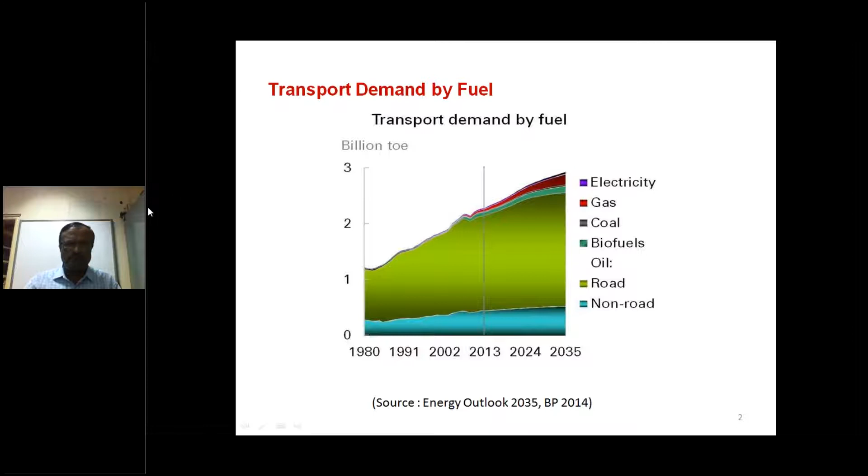So before that, let us have a glance over the basics of engines. It's actually not necessary, but it is part of this. For those who have not studied this, it will be useful. So I'll go quickly over the engine fundamentals.

The internal combustion engine is a compact engine, and that machine was invented in early 1680, first by Christiaan Huygens. This engine converts heat energy into mechanical output power.

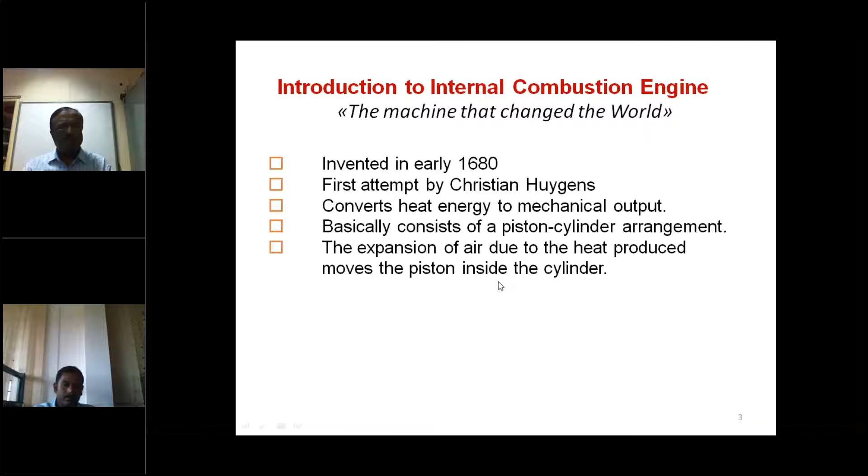Basically, this engine utilizes the slider crank mechanism, which consists of a slide, that is a cylinder and piston arrangement, connected to the connecting rod and crank, and thereby reciprocating motion is converted to rotary motion. Simple mechanism. In order to move the piston, some gases are to be expanded, and thereby that gas, that is the air, is taken and it is heated by means of burning the fuel. That's why all these processes are carried out inside the cylinder.

Now, as you know, there are various types of IC engines that are classified based upon various categories. Mainly we have two major classifications, and others are sub-classifications based on the combustion that is taking place. Spark ignition engine, that means the petrol engine. This engine, as you know, is a very compact engine, giving high power density with low combustion noise, low vibrations, etc. So many more advantages are there with these SI engines.

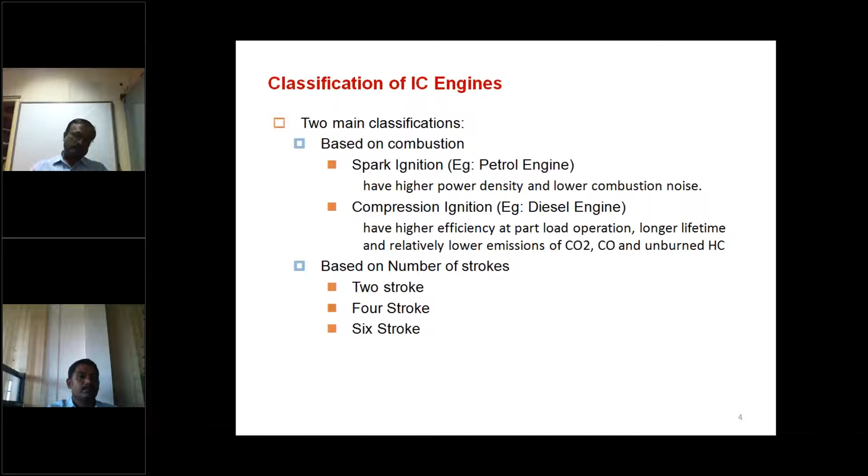The other class is the compression ignition. You can see at part load operations, these are the best engines, with lower emissions of CO2, CO, carbon monoxide, and unburned hydrocarbons. This engine is mostly used for almost all vehicles nowadays because of the economy in fuel. Then based on the number of strokes: 2 strokes, 4 strokes, and nowadays 6-stroke engines are being developed for better efficiency.

Regarding the working, here I have taken the four-stroke engine, that means the petrol and the diesel engine. We shall have a fast glance over this, so that whatever modifications are needed, the performance can be improved and the emissions can be reduced. So we can think of the four-stroke petrol engine. During the suction stroke, the air and fuel are mixed thoroughly and sucked in, during which the inlet valve opens, and this continues until the piston reaches BDC. Then during the next half revolution of the crank, the piston moves from BDC to TDC, compressing the air-fuel mixture into the small combustion chamber or the clearance volume.

At the end of compression, the spark is given, and more heat is added, so the pressure and temperature of the mixture rise, exerting the necessary force, and the piston is pushed down. That way the engine produces the power, hence we call this the power stroke. Afterwards, in the next successive half revolution of the crank, the piston moves from BDC to TDC, and the burnt exhaust gases are let out by opening the exhaust valve. Here the valve operations are very important: when the valves open and when they close.

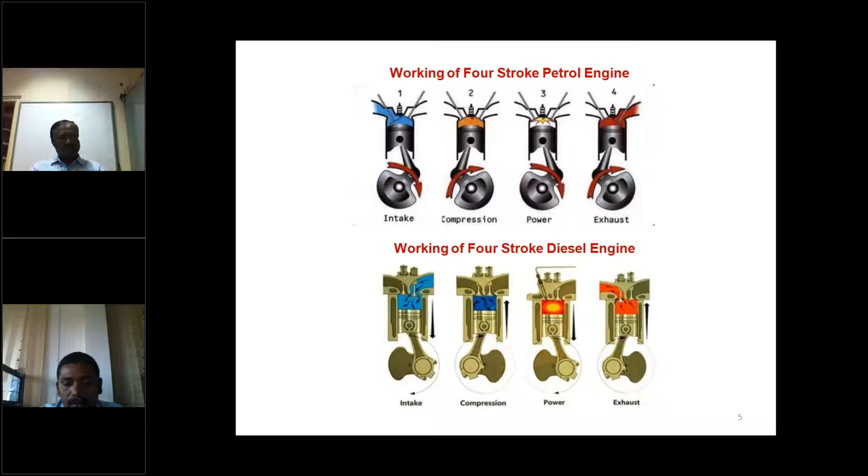Here also the valve operations play a very important role in the performance. If they are opened and closed at the right time and accurate positioning, the intake will be proper. If the intake is proper, the power produced will be higher. And the exhaust gases must be removed perfectly by the exhaust valves, so that timing is also very important. And here, instead of a spark, at the end of the compression stroke the diesel is injected. So the injector timing is very important.

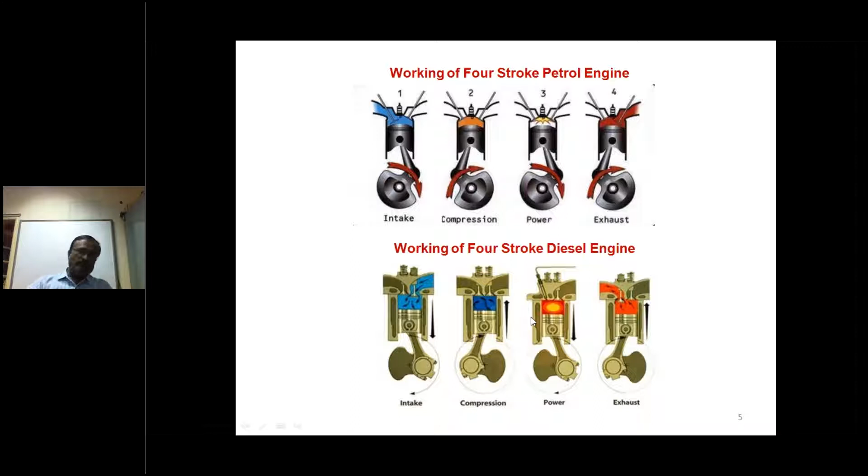So these are the things that we have to consider while modifying or improving the performance of the engines. These are for the advancement of the engine. From the combustion point of view, we have to look after advanced combustion engines. So the goals and strategies are set up.

The internal combustion engines have been used for more than a century. As I told you, it was invented around 1680. Since then, it has been modified, and significant improvements in energy have been found. Efficiency is being boosted, and also the emissions are being decreased. Though it is optimized, there is still scope to increase the efficiency and reduce the emissions.

The boosting of efficiency, or the increase of performance, is one of the most promising and cost-effective approaches. Due to this, we can find fuel economy, and thereby we can save a lot of fuel, and thus we can get higher efficiency.

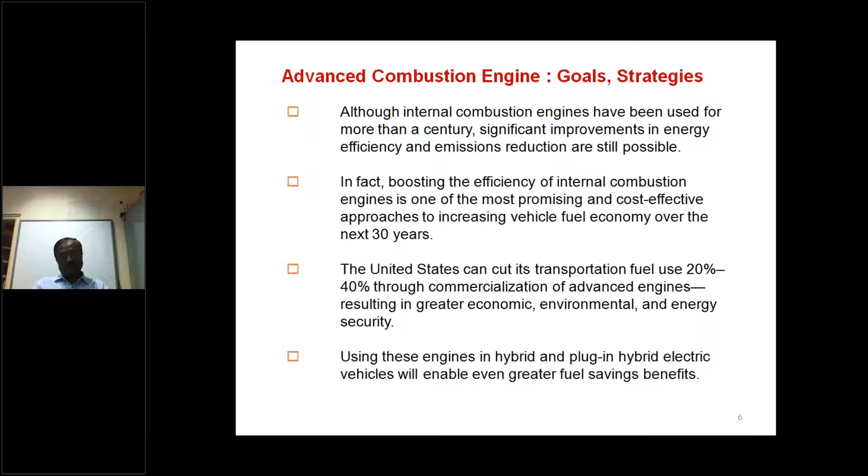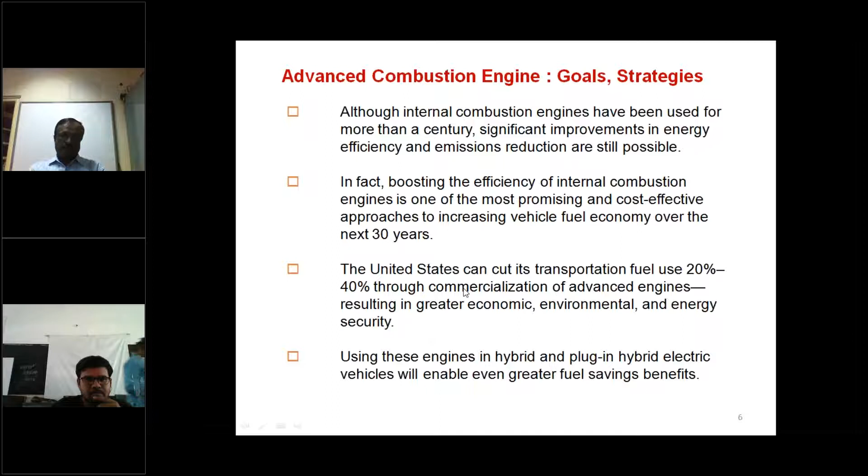The United States has already adopted the most modern engine designs, thereby saving 20 to 40% of fuel through commercialization of advanced engines. That resulted in economic, environmental, and energy security. Using these engines, there is also another scope - they adopted hybrid engines, hybrid vehicles, which utilize both IC engines and electric motors. Using this, they were enabled to save a lot of fuel and get more power.

The advanced combustion engines research and development sub-programs have led to major advances in engine and vehicle development, including efficient combustion strategy, emission reductions, health effects, computer modeling, and exhaust heat recovery.

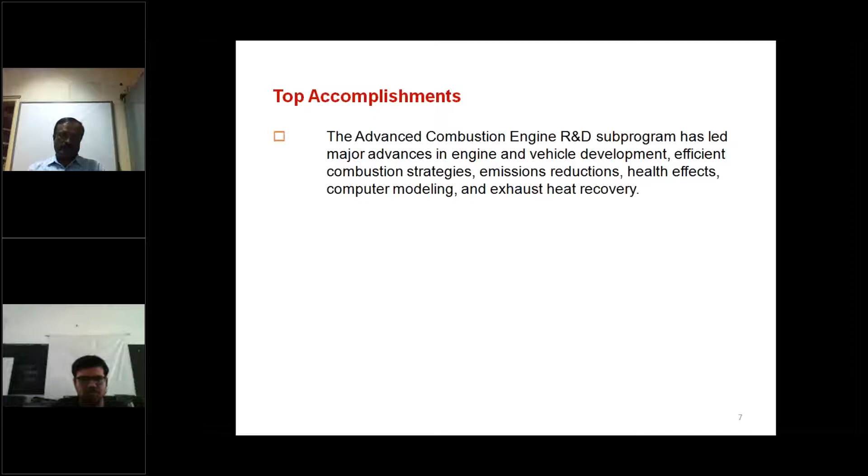So let us discuss one by one how the modifications are being taken up slowly, and thereby you will come to know what are the changes that have taken place from conventional engines to the most modern type of engines, and what new technologies are being used here. One of the most recent advances being researched is...

the homogeneous charge compression ignition engine, HCCI it is called. So we have the petrol engine, where the advantage is the fuel is mixed before entering into the cylinder in the carburetor. Air and fuel are mixed properly in the correct proportion.

Then the fresh charge is inducted into the cylinder. So this will give us homogeneous mixing, thorough mixing of the petrol with the air in the correct proportion. That's the advantage of the spark ignition engine or petrol engine.

In the diesel engine, during the suction stroke, only air is inducted, and at the end of the compression stroke, diesel is injected. This will not give proper thorough mixing, because the time available for combustion is very, very less. Due to this, some part of the mixture becomes heterogeneous, not homogeneous.

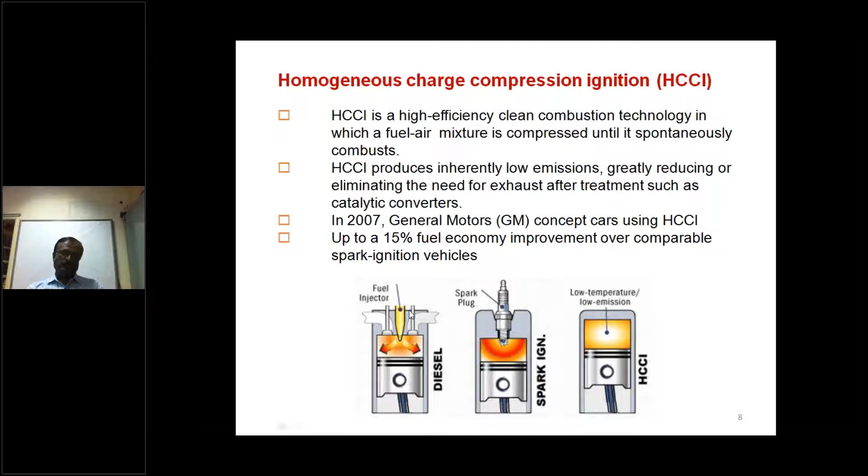This engine was already being tested by General Motors in 2007. The concept is being used, but modifications are still going on, and the latest technology is being used to improve the performance of these engines. Due to this, it is found that 15% fuel economy can be obtained. It was tested with the same size engines, comparing the diesel engine and the HCCI engine, giving 15% more fuel economy. These are the advantages we are discussing.

The fuel is a lean fuel burning, so they can operate at diesel-like compression ratios, which for diesel engines is very high. What is the advantage of a high compression ratio? As the compression ratio increases, the thermal efficiency also increases. In petrol engines, we cannot go beyond a certain limit because of knock problems. But in HCCI engines, we can have a compression ratio greater than 15, thus achieving 30% higher efficiency than conventional SI engines.

The mixing of fuel and air leads to cleaner combustion and lower emissions. Due to low temperature, the peak temperatures are significantly lower than in typical SI engines, so NOx production is negligible. That is a very added advantage nowadays, because for diesel engines we are getting NOx, which is a very harmful gas, but that can be controlled here.

In HCCI engines, they can operate on multi-fuel, meaning either gasoline, diesel, or alternate fuels, even biodiesel, can be used. Since the throttle is completely absent in this engine, throttle losses are avoided, and this further improves the efficiency.

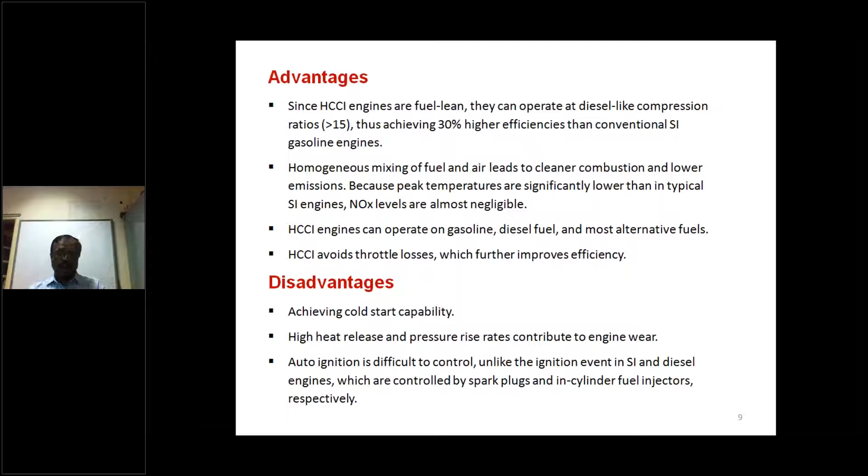Auto ignition is difficult to control. In petrol engines, we can control the timing of the spark, allowing us to optimize the burning, efficiency, and performance. In diesel engines, optimizing the timing of diesel injection changes the performance similarly. But in the HCCI engine, this is very difficult to do.

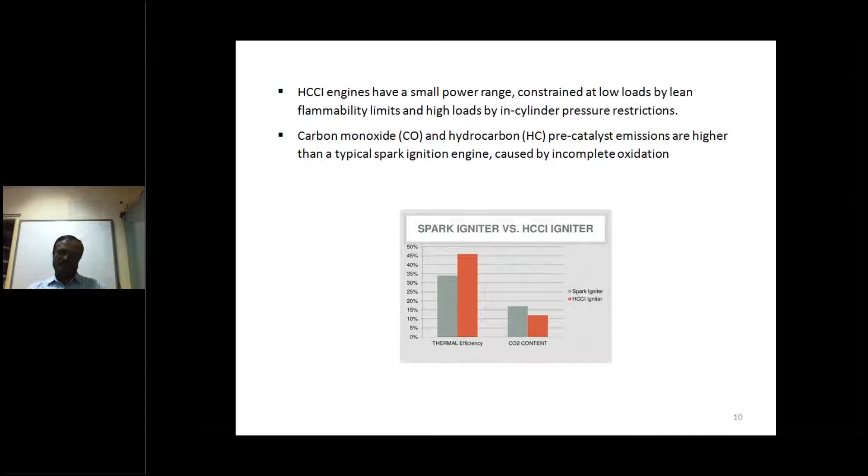And then for the emission wise, carbon dioxide, here it is very less for the HCCI, which is an advantage for us. So this is HCCI. Still research is going on, and in future we can get the HCCI engines.

In case of the Otto engine, petrol engine, the maximum temperature is 2200 degrees centigrade, and in case of diesel engine, 2000. If turbo engines are used, that means boosting is done, then it rises to 2500 and 2200. These temperatures play a very important role in case of the output power and also the emissions.

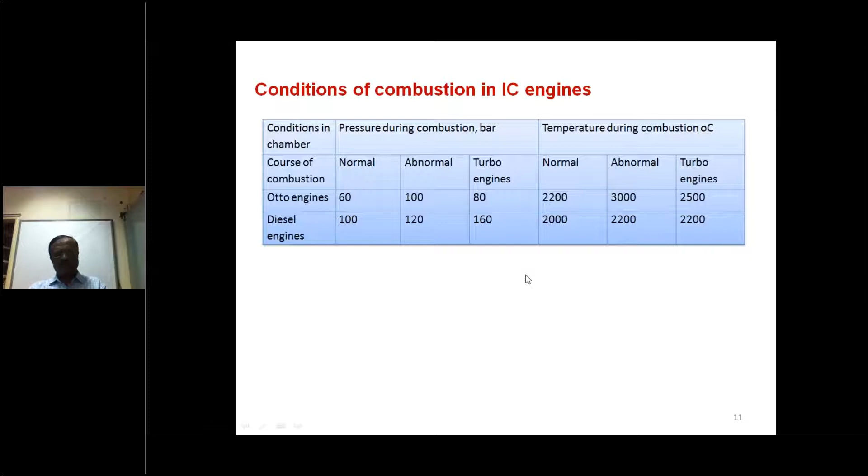Now after this, let us come to the major areas where advancements are possible - the things on which we concentrate so that performance can be improved. The vision behind evolving IC engines was to extract maximum power with minimum fuel consumption. With this, we can get optimum performance and also reduction in emissions from the engine, which is a major contribution required nowadays to satisfy the norms put forth by emission authorities.

The major areas of advancement are engine design, material selection, timing control - that means valve timing control or fuel injection timing control - and then fuel injection and combustion, which is being controlled. If it is controlled, we can have variation in the performance.

Then utilization of some alternative fuels. As the depletion rate of petroleum products is increasing at a faster rate, we have to have alternate sources. Therefore biofuels are being invented and researched. We are not discussing biofuels now, but these are the things we are going to discuss.

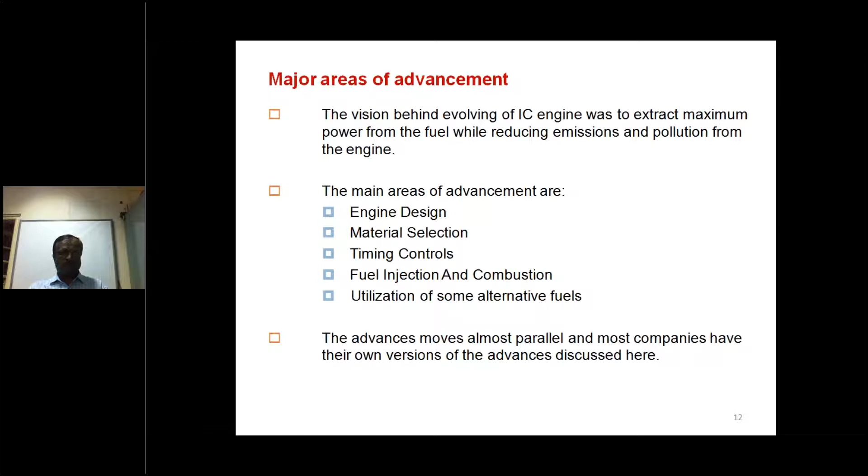The early designs involved a single cylinder. Whatever early vehicles there were, they were fitted with a single cylinder. If more power was required, larger diameters were used, and thereby the stroke length also increased, making the engine bulky. With a single cylinder, a lot of problems arose causing large amounts of fluctuation, from a dynamic point of view and also the power output point of view, and the consumption was very high. So these were the restrictions that existed.

So using more number of cylinders was considered for more power and reduced fluctuations. The engine was dynamically balanced due to the addition of cylinders, and the engine was made compact. Instead of using single large cylinders, we can use smaller diameter multi-cylinders, which solves the dynamics of the engine.

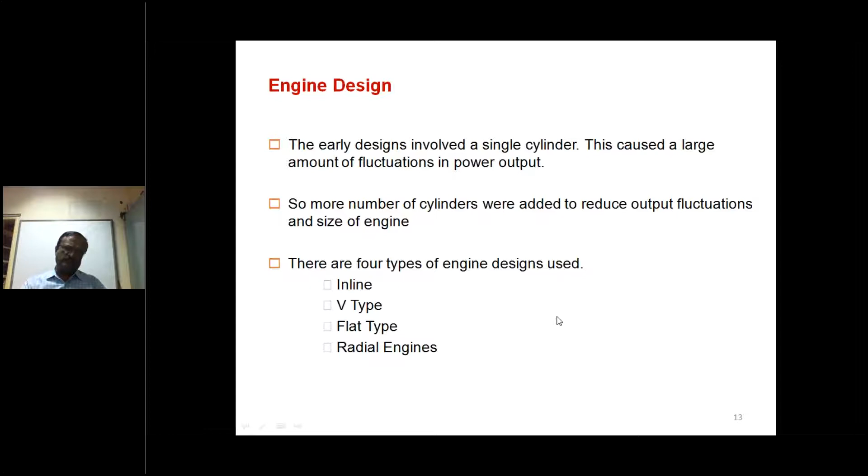Now, engine structures - how the engines are placed. Based upon that, we find many types of engines. There are inline engines - 3-cylinder, 4-cylinder, 6-cylinder inline engines, which are used in cars, buses and trucks. Then V-type engines, then flat type, that is horizontal cylinder or opposed cylinder type, then radial engines. These are the classifications based upon the positioning of the cylinders.

In the inline engine, the cylinders are placed in line, parallel to each other. This has much more advantages, which I'll discuss. Then the radial engines, where the cylinder lines are placed along the radial lines, with all the connecting rods connected to the common crankshaft.

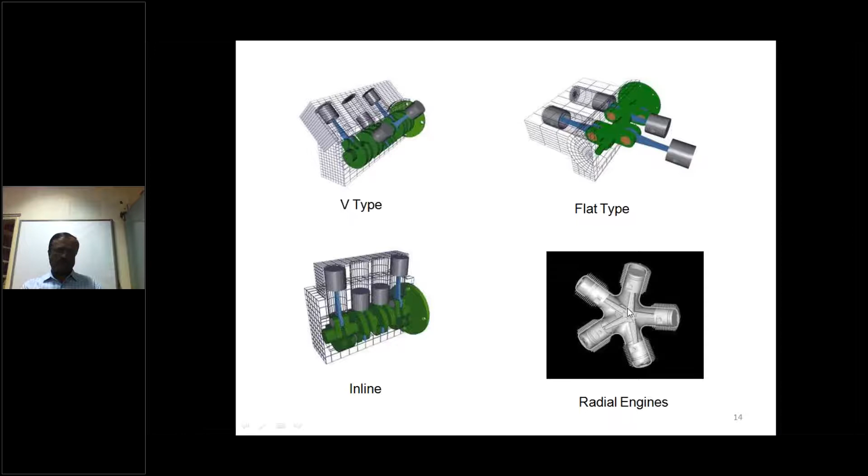Let us see the comparative advantages quickly. In V engines, more pistons, that is 6 to 12 cylinders, are used. The crankshaft length is much shorter, and it has a small crank, which is an advantage.

So within a compact space it can be fitted. More torque output is achieved due to the greater number of cylinders. Then good power to weight ratio, high power with less weight. Then high speed, with more power strokes.

Disadvantages of the V cylinder engine: we have more components involved. It is heavier, more expensive, and more complex in design.

The horizontal or boxer type engines offer perfect balance. From a dynamic point of view, they are very well balanced engines. There's added power boosting, and a unique opposed cylinder design.

Since all the cylinders are placed in a horizontal plane, the engine height is very less, which reduces the center of gravity. This engine is useful wherever a low center of gravity of the vehicle is required, for example racing cars. Horizontal engines are preferred there, and they are also more powerful.

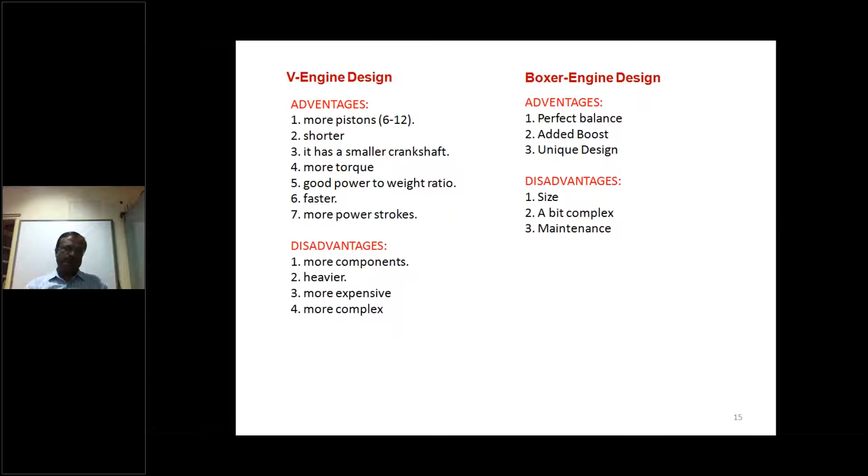Radial engines have a much simpler design, are reliable, and easier to build. From a service point of view, they are very easy compared to inline piston engines. Even the cooling of the cylinders can be done evenly throughout, since it's a radial engine all along.

Radial engines have a very short space front to back, just like a V engine. They are also lighter, so a light engine can give higher horsepower, achieving high power within a compact space.

The only issue is that in this case, a lot of oil is consumed and burned, which is one disadvantage. There's also significant drag from the huge surface area presented to the airstream. And since the firing is along radial lines, there tends to be a leakage problem.

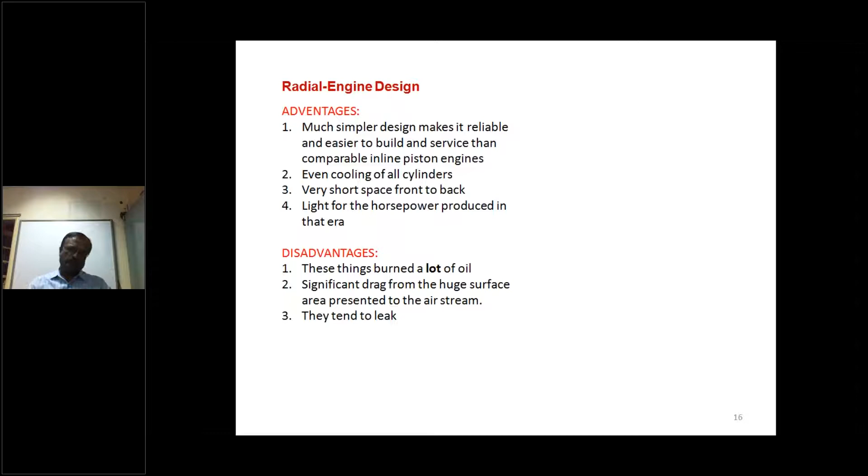So these are the relative advantages and disadvantages of cylinder positioning. But we mainly use inline cylinder engines in almost all vehicles. The major advantage is that they are naturally balanced, and they don't normally need balancing shafts.

The forces produced by the various pistons and connected to the crankshaft are uniformly distributed. This produces less vibration, less noise, and less wear and tear. Thus the bearings are loaded less, giving smoother operation.

They have a higher top end as pistons, meaning all the pistons fire in the same direction. This gives smooth operation and smooth combustion, which are the added advantages of inline engines.

The disadvantage is that it is taller. Since the cylinders are placed parallel to each other, the length of the stroke or cylinder becomes taller. So if fitted to a vehicle, there will be an aerodynamic problem, which is a major disadvantage.

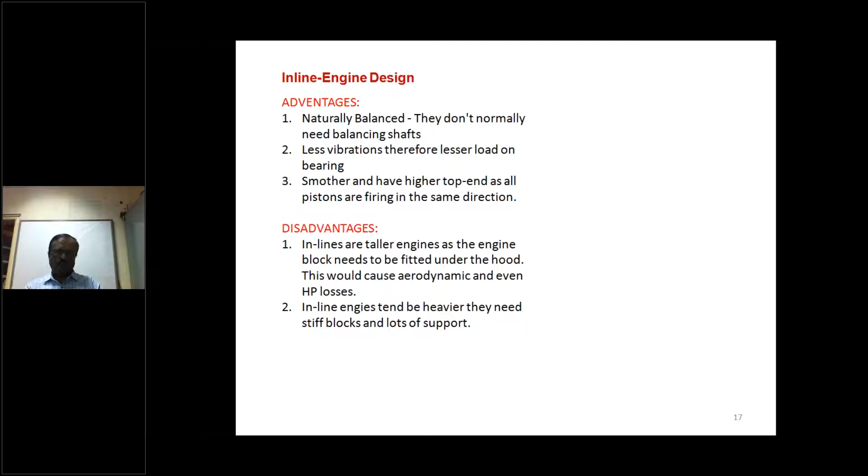The inline engine also tends to be heavier. It needs stiff blocks and lots of support to avoid vibratory motions. This concludes the discussion around the positioning of the cylinders.

Another parameter for advancement is material selection, which is very important. The engine works under various operating conditions: some elements work at higher temperatures, some under higher fatigue, and some under vibratory forces. We have to take care of all these while designing it.

So the weight of the material, meaning lightness, is very important, and so that it can operate at high temperature.

So there the care to be taken: coefficient of expansion, so that it should not be deformed under any conditions. Then heat transmission power, transmitting the power. Then vibration and sound damping. So these are the things that are to be taken care of.

For example, the piston requires high temperature, then a high amount of heat is to be dissipated quickly, so we have to see the thermal conductivity. And lightness is important there, so the weight of the material is very important in that case. So like this, the material selection.

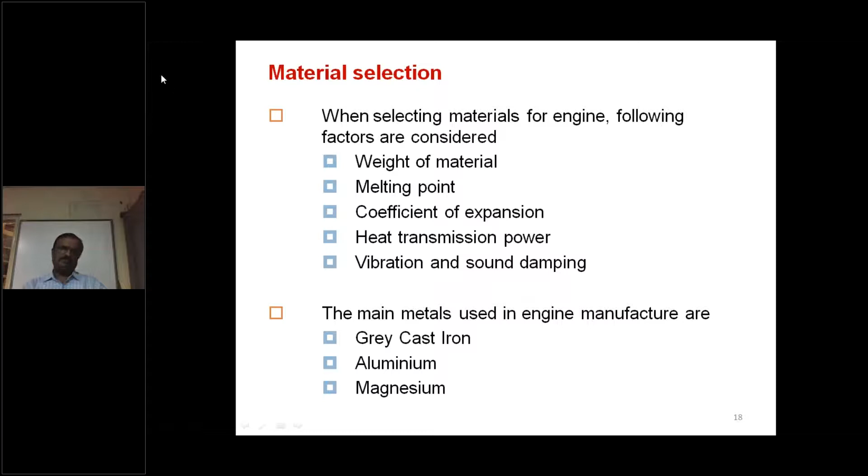They mainly consist of gray cast iron, aluminum, and magnesium. Apart from this, sodium is also used in the engines.

The pockets or engine parts are made hollow. That means the pockets are made, and in that the sodium is filled. Metal sodium is filled, especially where a high amount of heat is generated or it is subjected to high temperature, where a high dissipation rate is required.

For example, the exhaust valve, which operates at high temperature. The high temperature gases flow over the valve when it opens. So a high dissipation rate is required in order to operate coolly. For this, the valve is made hollow, and sodium is filled inside it.

When the temperature of that part becomes greater than 160 degrees centigrade, the sodium gets melted. The melting point of sodium is 160 degrees centigrade. So whenever it crosses that, the sodium melts, and in the molten state, the thermal conductivity of the molten sodium will be very high, thus dissipating heat very quickly.

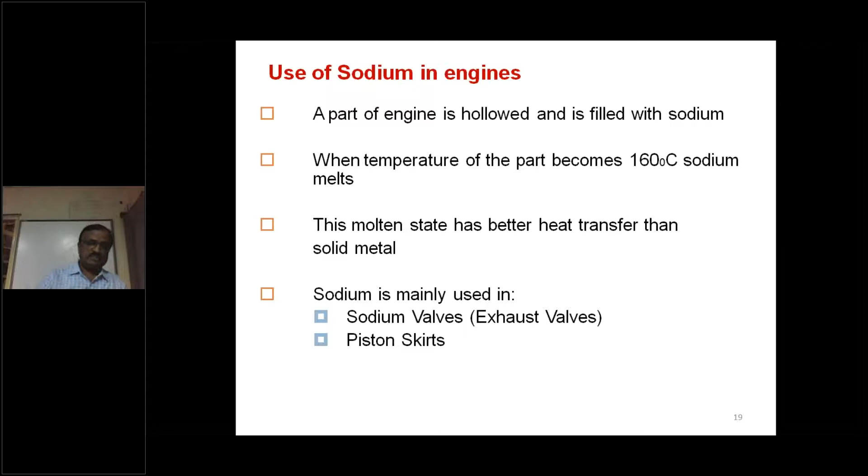So, application-wise, the sodium valve - that is the exhaust valve - and the piston skirts.

Then the next parameter we'll discuss for improvement or advancement is timing control. The efficiency of the engine depends mainly upon the timing of its sequence operations. The timing of inlet and exhaust valves, when they are opening and closing, exact timing is required, because the inflow will have an impact on the power produced.

Then the outflow of the burnt gas, that is the exhaust, will have an adverse effect on the engine. If the scavenging is not proper, it will lead to dilution of the fresh charge. So the timing must be correct.

The timing of the spark that is given in case of SI engines. Then sequence operations of each cylinder in a multi-cylinder engine - that means when which cylinder is firing, that is the sequential operations, the firing order as we call it. So these are the things that are to be considered.

In normal case, these timings are design parameters set at the time of manufacture. They are fixed for conventional engines. Whatever industrial engines are there, they are fixed - they cannot be changed. Now in modern vehicles, these timings can be varied during operation - this is a major advancement taking place.

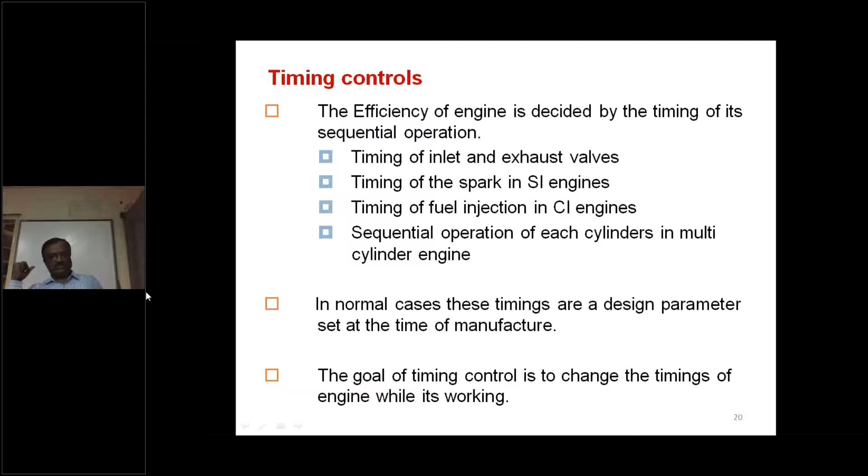All the vehicles that you can find, the timing is varied according to the conditions of operation - that is low speed, high speed - during power boosting, like this. The goal of timing control is to change the timing of the engine while it's working, in order to boost the engine.

Timing of inlet and exhaust valve, as shown in this figure - you've studied the thermodynamics of this. You can see the inlet valve should theoretically open when the piston is at TDC, but it opens before the piston reaches there. This extra 20-25 degrees is provided in order to suck in more amount of fuel, so that by the time the piston reaches TDC, the valve will be in fully open condition, giving maximum passage for the inflow of air or fresh charge.

And thus, again, you can see here the exhaust valve. The only important point I'm highlighting: the exhaust valve opens before it theoretically should - actually it should open when the piston is at BDC, but it opens before that, around 40 to 45 degrees before BDC.

So the purpose is, the burnt gases have already expanded, most of the gases have been expanded, and it has given the work, and now it is ready to be expelled out of the cylinders. And therefore, if it is open, the high pressure will let the gas out of the cylinders. So this will help in evacuating the cylinder. The proper scavenging will occur, so that by the time the piston reaches the TDC, the complete cylinder will be evacuated, and it is fresh and ready to suck the fresh charge.

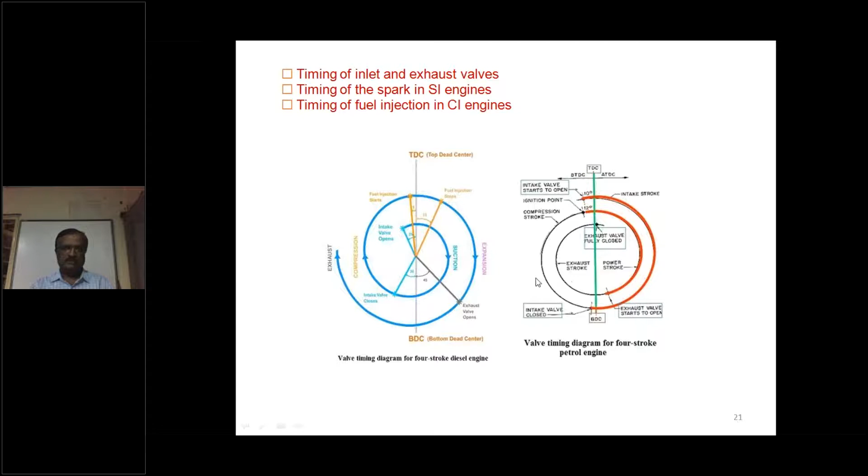Then the sequence of operation of each cylinder in the multi-cylinder engine, that is one of the parts. So here the firing order means the order in which the firing is taking place. All the cylinders will not fire at a time, so one by one. If the suction is going in the first cylinder, then another cylinder will be in compression mode, another cylinder will be in exhaust mode, and like this.

So next the cylinder number 2 will fire, or in the next stroke the cylinder number 4 may fire, or third. So like this, the firing order is decided based upon the balancing point of view. It depends on the manufacturer, so from manufacturer to manufacturer, it changes. So that's one thing we just take care of.

Then the sparking of the spark plug in the gasoline engine in the correct order, or the sequence of the fuel injector in the diesel engine. That means firing is done by giving the spark by the spark plug in an SI engine, and by injecting the fuel by the fuel injector. So these timings can be altered. When designing an engine, an appropriate firing order is to be selected.

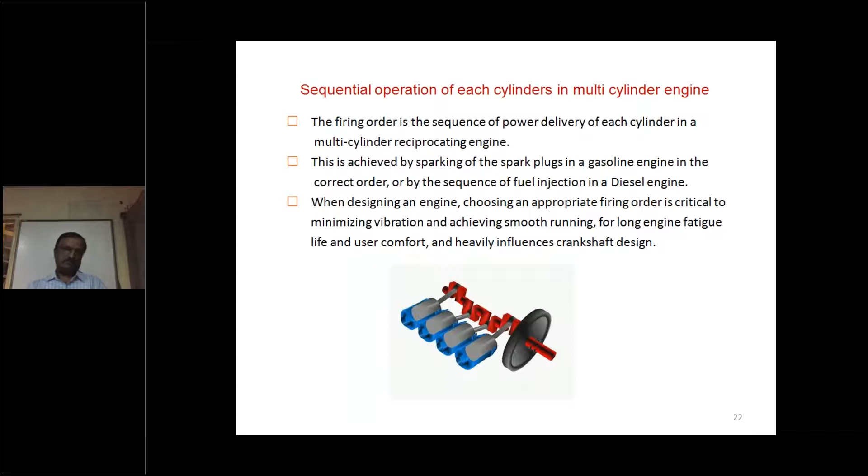It is critical. If it is not properly maintained, it leads to vibration. So the order is critical to minimize the vibration and achieve smoother running conditions. For long engine fatigue life and user comfort and heavily influences crankshaft design. So all that depends upon this.

For the conventional engines, all these timings are fixed, but in modern engines, with the advances for improvement in power, these timings are varied. They are called variable valve timings. All the vehicles you find on the roads nowadays are fitted with the most advanced engines with these features. At low RPM, the timing is adjusted for maximum efficiency.

So for controlling these valve timings, at what time, what should be the duration, at low RPM, at high RPM, at high power range, at high torque, these are the various operating conditions we get while operating vehicles. All these timings are controlled by a microcontroller, which controls the solenoid with which the valve can be opened wide or opened less.

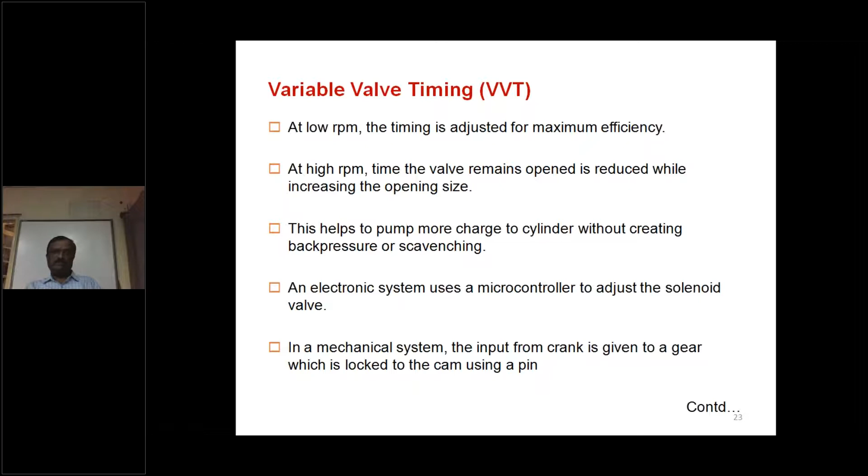In the mechanical system, it is coupled to a gear which is locked to the cam using a pin. In most computer-controlled engines, they are varied like this, and they are called VVT. When adjustment is needed in the mechanical components, a pin is removed magnetically and the stepper motor adjusts the cam. Almost all manufacturers use this technology in their advanced or powerful engines.

There are more or less norms to use these. There is no definite rule for that; different manufacturers use different norms. It would be impossible to meet the strict emission norms that are in place without this. According to the norms, if you control these valve timings, it will boost the power, and at the same time the emissions that are taking place can be controlled. So timing is very important.

Likewise, on modern vehicles you can see it written. If you have a Hyundai vehicle, VTVT is written, variable timing valve train, or on the Maruti Suzuki VVT is written. That means variable valve timing. The timing is changed according to the performance. It changes continuously; the microcontroller varies it, and thereby it also continuously has the power fluctuation,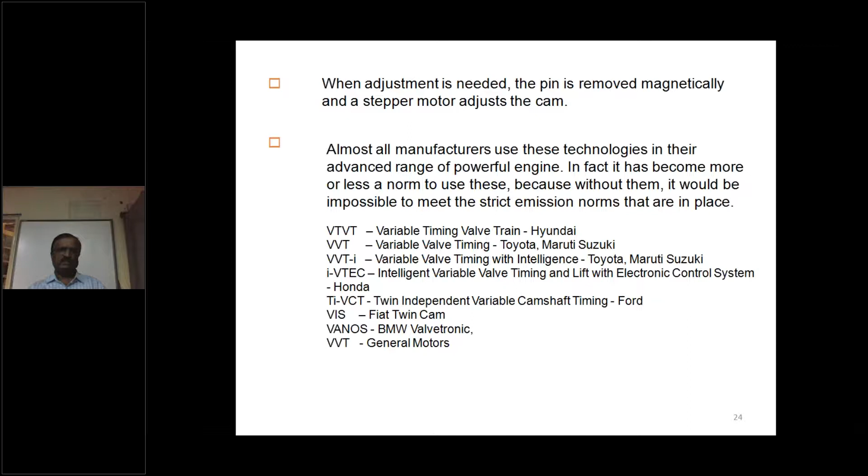Then BMW VANOS system, again it's a VVT. General Motors, again it's a VVT. It's the most common technology, so that's why on the car it is written VVT or VVTI or i-VTEC. You have observed that. So here is how it happens. Under no load conditions, or whenever the power requirement is very less, or the engine is operating at low speed, the valve lift is very less; it is lifted a small distance. In the cruising mode, that means high speed operations, the valve is lifted to a wide height so that more charge can be sucked in or inducted into the cylinders. So this is the technology.

This is a valve mechanism which we find in i-VTEC, that is intelligent variable timing and lift electronic control. This i-VTEC is a combination of VTEC and VTC, and it operates intelligently for both conditions. This is how the valves can be operated, and this is a mechanism where the valve camshaft can be adjusted by means of the solenoid valves. It can be shifted up, and corresponding shifting takes place.

So the lobes touching the cam: sometimes it runs without the lobes, meaning it is inoperative. When it is shifted, it comes in contact with this lobe and is pushed through a higher displacement, and when it contacts this one, it is pushed through a smaller displacement. Thus it can vary the valve displacements. Almost all manufacturers are adopting this for enhancing performance.

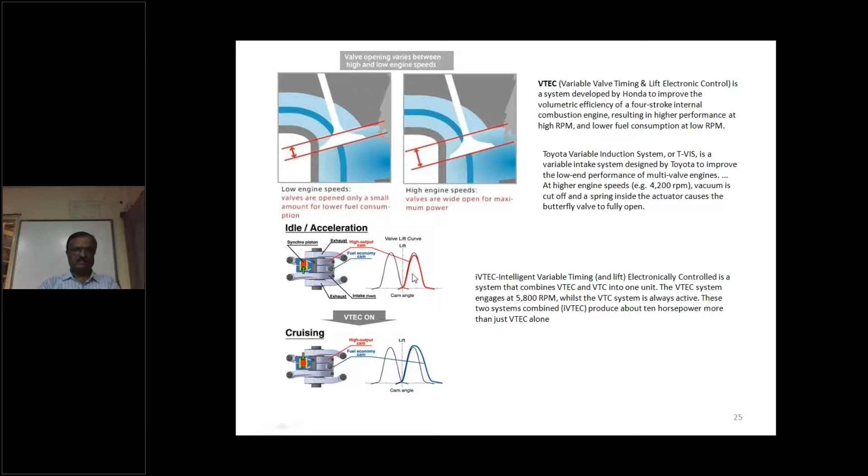Another parameter we have is the active valve train. In the active valve train, two cams are used for two different road conditions. When the microprocessor detects that the vehicle is moving on rough terrain, the cam used will be the one for more power. The cam is adjusted so that it gives more displacement, and thus the power can be boosted.

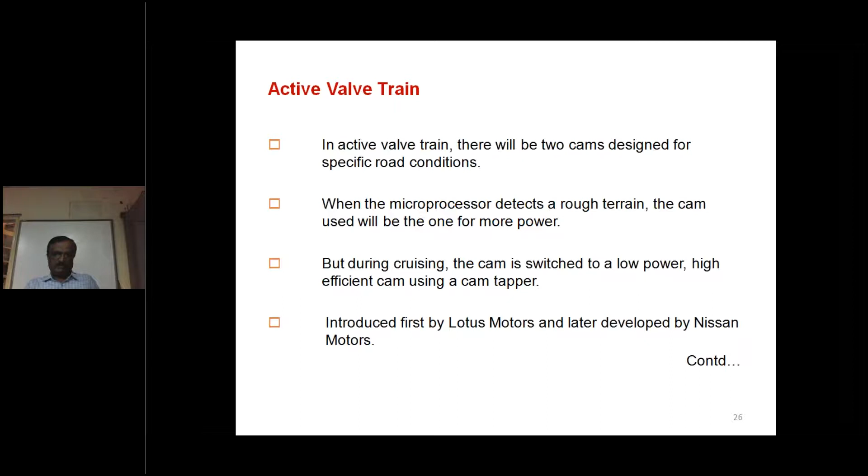During cruising, the power requirement is very less, so that much displacement is not required. Therefore the microcontroller automatically switches the cam to another lobe having less depth, and the operation is adjusted for high efficiency. This was introduced first by Lotus Motors and later developed by Nissan Motors. Here you can observe how the mechanism is placed: smaller lobes and higher lobes, one cam profile and the other cam profile, with the rocker. This is how it operates.

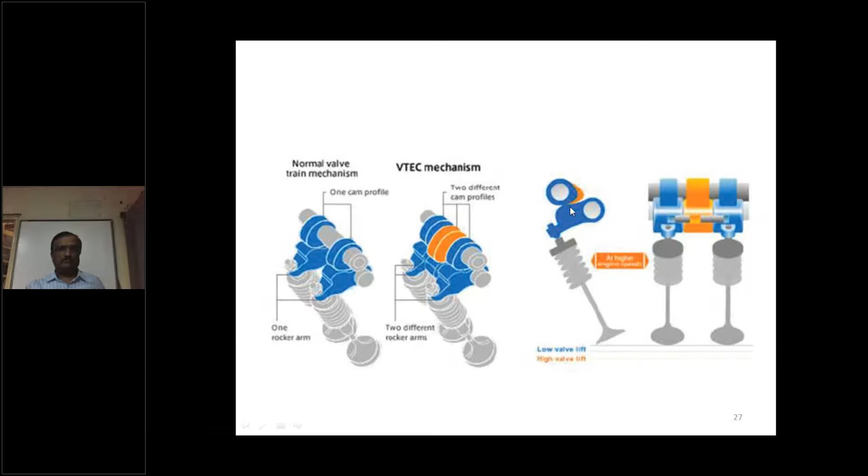And then cylinder deactivation. Sometimes we do not require much power, when the vehicle is running at steady speed or in cruising mode. If we deactivate some of the cylinders, that means stop the firing in some of the cylinders, fuel saving can be done. Cylinder deactivation is a derived form of active cam switching. In this method, while cruising, part of the cylinders are switched off by switching to a cam without lobes, just cylindrical, circular, without any risers.

This method is successful because it will lead to lesser fuel consumption, less heat generation, and lesser power lost in managing other cylinders. So burning of the fuel in the other cylinders can be avoided, and thus we can achieve fuel economy. This is mostly employed in V-type engines.

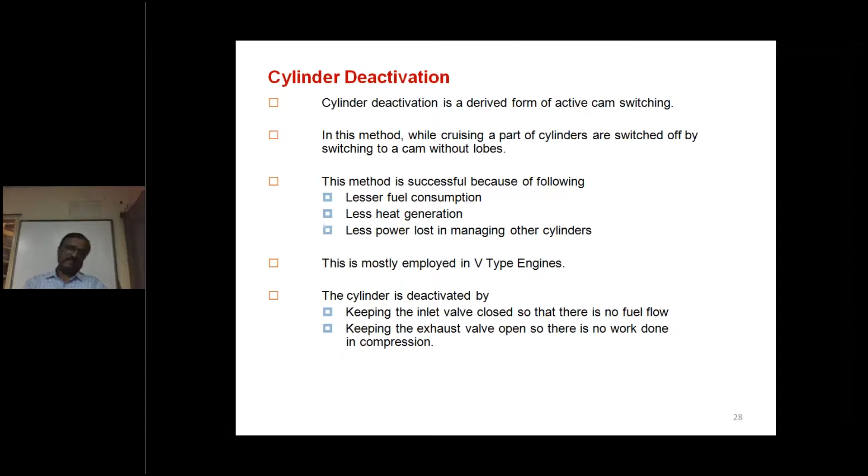The cylinder is deactivated by keeping the inlet valve closed so that there is no fuel flow, and keeping the exhaust valve open so that there is no work done in compression. So deactivation is done. This is how you can observe here. This is a valve which is mechanically operated by means of hydraulic power. When it is in contact or activated, the valve is in action.

That means when the lobe comes in contact with this, the valve is pushed downwards and it opens. When the locking pin is pushed backwards by the oil pressure, there is no contact here. So if the lobe becomes inactive, whenever the cam goes, there will not be any... This is adopted by General Motors in some of their models, and Honda is also adopting this technology.

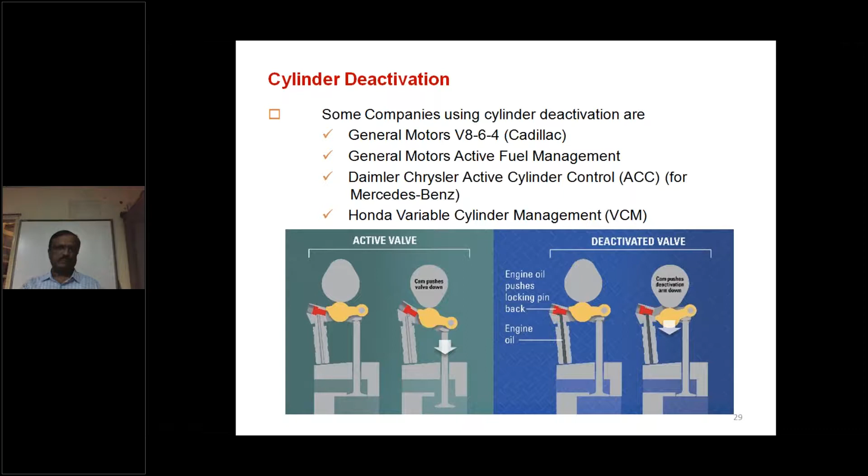Then fuel injection, the fuel input, highly influences the emission from the engine. When and what quantity of fuel is injected affects the performance, and also the air-fuel mixture, called the charge, that is introduced to the cylinder before compression. In CI engines, fuel is injected at the end of the compression stroke. This helps in attaining a higher compression ratio, and the higher the compression ratio, the higher the performance.

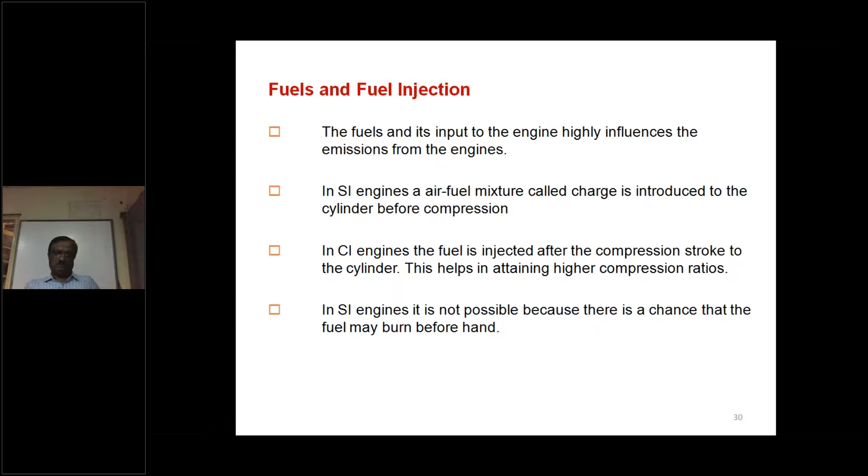In SI engines it is not possible, because there is a chance that the fuel may burn beforehand. If you increase the compression ratio, there is a possibility of knock, and thus the compression ratio is limited by knock in the case of a petrol engine. So we cannot increase it beyond a certain limit, and since thermal efficiency is a function of the compression ratio, thermal efficiency will be less. We cannot go beyond that.

So DI engines, that means direct injection in SI. So far SI engines were using carburetors, where the fuel and air are mixed thoroughly by the carburetor and that was injected. But now that technology is obsolete, so it is being converted. SI engines are modified to work just like a diesel engine, so with direct injection we get the advantage of CI engines.

In direct injection, first the air is filled the same as in diesel engines. Then halfway through the compression stroke, a small amount of fuel is injected into the cylinder so that a lean mixture is formed. At the end of compression, just before the spark, the rest of the fuel is injected, which leads the combustion. Thus the burning of the fuel occurs in a stratified way, so it is more uniform.

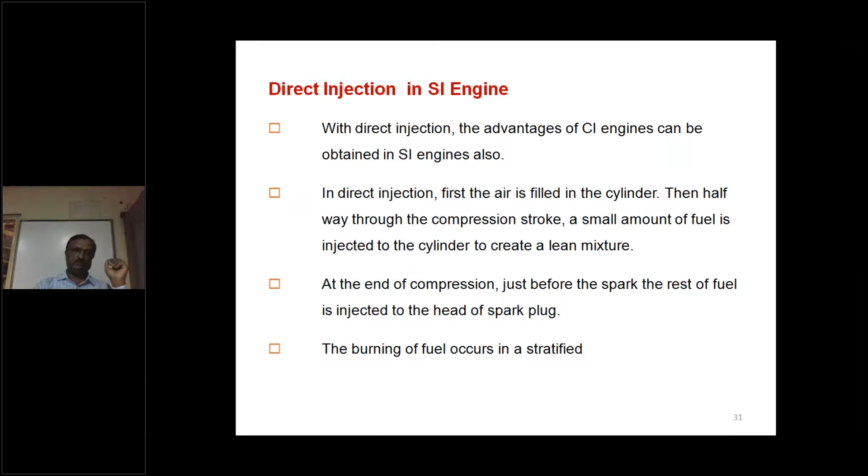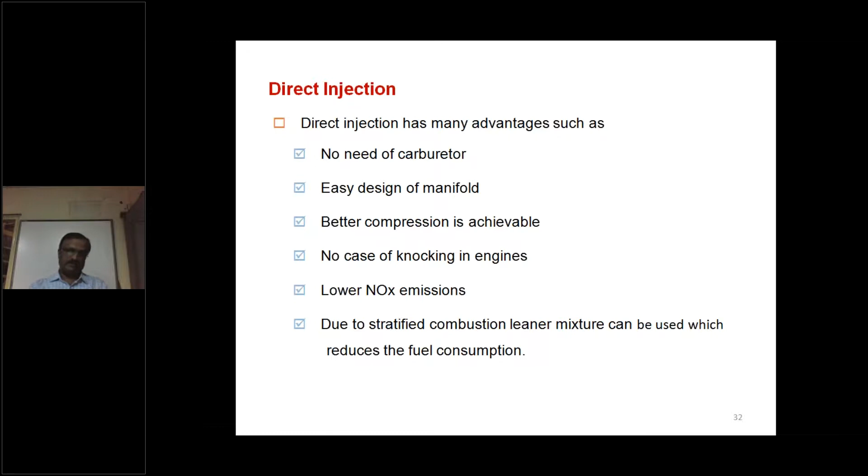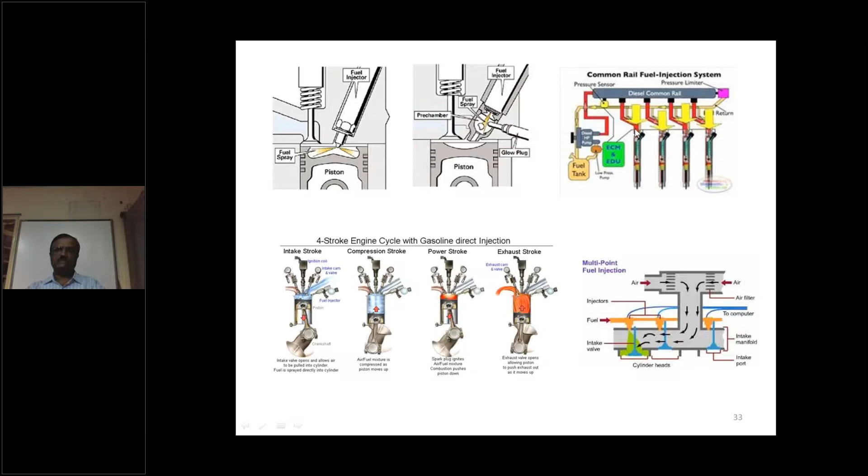These are some of the modifications, and over that, superchargers are used to enhance the power of an existing engine. Suppose we have an engine of 5 kilowatts. With the same engine we can go up to 6 or 7 kilowatts by boosting extra air. Over and above natural aspiration, if more air is inducted, more power can be achieved.

So this is the principle that is used. The extra putting of air is done by means of a supercharger or turbocharger. Superchargers are compressors coupled to the engine.

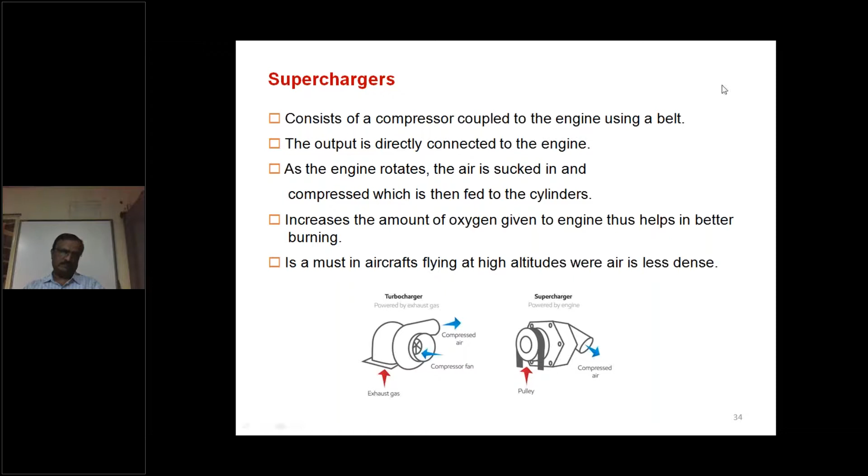As the engine rotates, air is sucked in and compressed, then fed to the cylinder. At higher pressure, more air will be going in. Increasing the amount of oxygen to the engine gives better burning, and it is a must in aircraft flying at high altitude where air is less. This helps the aircraft engine get the most air boosted in.

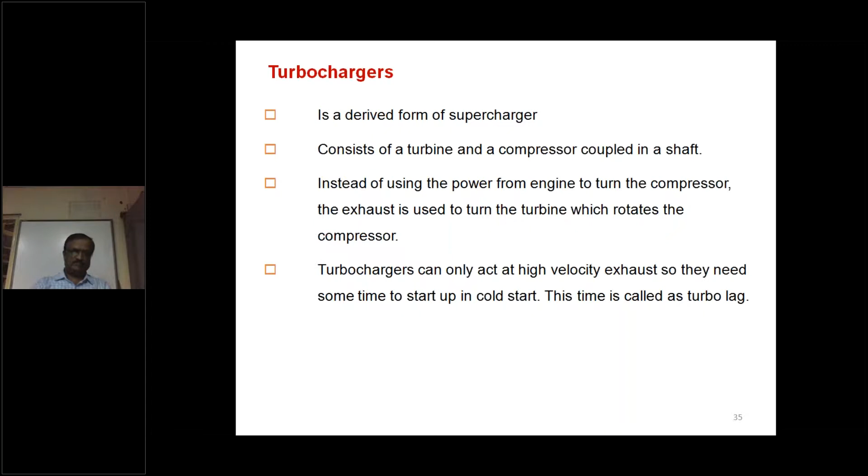Another way of enhancing the power is by using turbochargers. The working principle is the same as superchargers, but turbochargers are not connected to the crankshaft. Instead, they are driven by the exhaust gases coming out, and due to that the power is generated and coupled to the compressor, which compresses the air and supplies it to the engine.

So these are the things regarding the fuel that we can have. We can improve the performance by these means.

Another concept, apart from two-stroke and four-stroke engines, that is nowadays being taken up for research is the six-stroke engine.

It has an advantage. The six-stroke engine is a basic engine that is a combination of two-stroke and four-stroke. The advantages of both two-stroke and four-stroke are combined together, so it's called four strokes plus two strokes, totaling six strokes. This is how the engine is being designed.

It has a lower weight-to-power ratio and less scavenging problem. In a two-stroke engine, scavenging is a problem, but in a four-stroke engine that is not there, so here it can be completely avoided. Thus the advantage of the four-stroke cycle engine is taken care of. Also, fewer moving parts, which is an advantage of the two-stroke engine, is taken care of here too.

More power and fuel economy is obtained because of the six strokes. Clean burning is obtained, which leads to fuel economy, and complete combustion leads to more power. So the six-stroke engine gives more power and fuel economy.

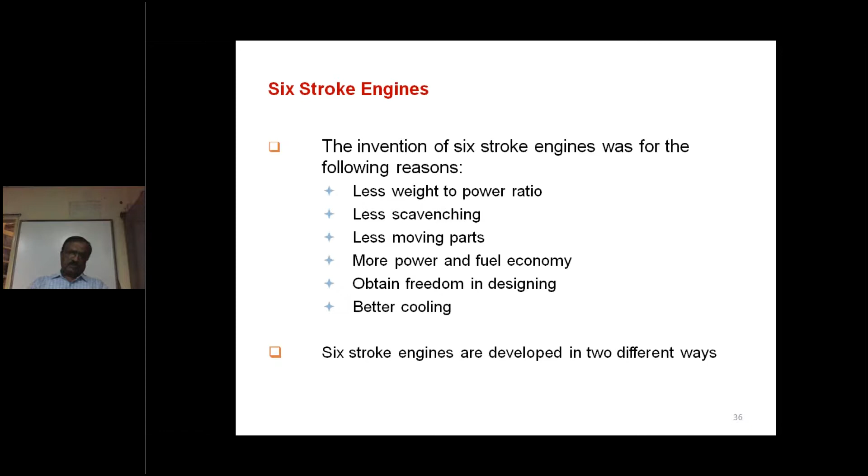There is much more freedom in designing, and better cooling can be obtained in case of six-stroke engines. It can be developed in two different ways.

But still the cylinder top and combustion chamber remain hot, so that heat can be recovered. In a four-stroke cycle, after this the intake stroke would start again, but instead of starting the intake stroke, something else is done now.

After the exhaust, some water is fed into the cylinder. Since the piston top and cylinder surfaces are hot, this water gets the latent heat and is immediately converted into steam. Due to this, the volume increases, and as the volume increases, due to the rise in pressure, the piston is moved downwards. This is how another power stroke is obtained.

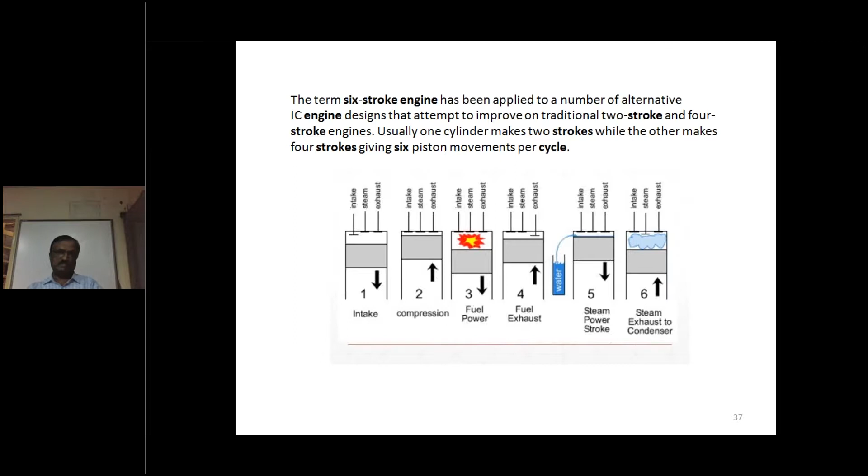This concept, the design, is still under research. So these are the things that are there.

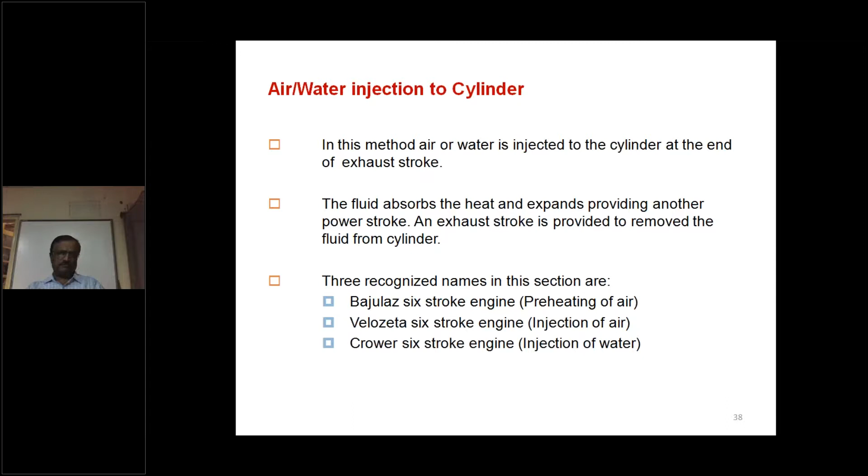Okay, so this is the slide here. These are the companies that are working on this analysis.

When the performance analysis is done comparing the four-stroke cycle engine and the six-stroke cycle engine, you can observe this. The thermal efficiency of the six-stroke cycle engine is giving much more than the four-stroke, about 40 to 50% higher. So therefore, the six-stroke cycle engine is also a very good concept for advancement in the IC engine field.

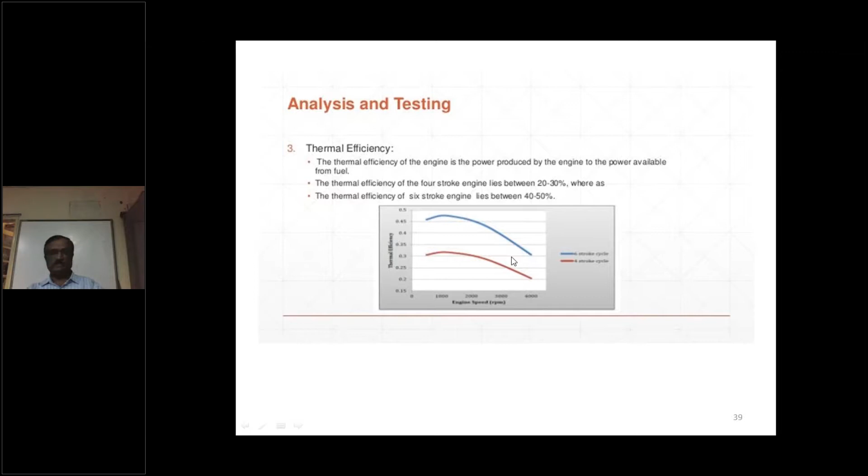Then the last parameter is compression ratio. It is a very important parameter as far as thermal efficiency is concerned. All of you being thermal engineering students know this. Thermal efficiency is a function of compression ratio - as the compression ratio increases, thermal efficiency also increases.

So this is being used for the advancement of the problem. For conventional engines, it is being kept constant for all these engines, whatever we are having. So it is constant, it cannot be varied.

Now new engines are coming up, the research is going on, so that as this ratio changes, that will enhance the efficiency. Thus the variation in the compression ratio is being tried. So it's called variable compression ratio engines. It can be changed.

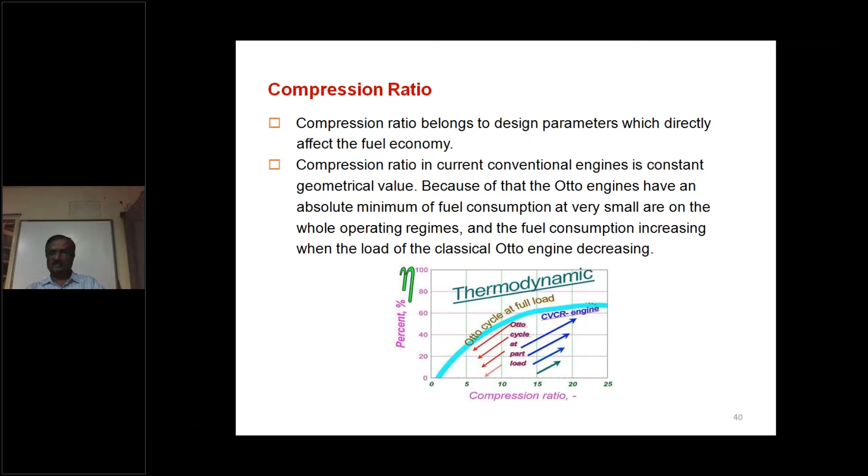Based upon the fuel that is being used, we can change it. So multi-fuels can also be used if we have this provision of variation in compression ratio. So this is the field of research.

The compression ratio cannot be increased to a larger extent in case of SI engines due to the knock that is applied. So a continuously variable compression ratio, what we call CVCR engines, in Otto cycle that means SI engines, is indifferent to operation on full or part load with high efficiency and the same octane ratings.

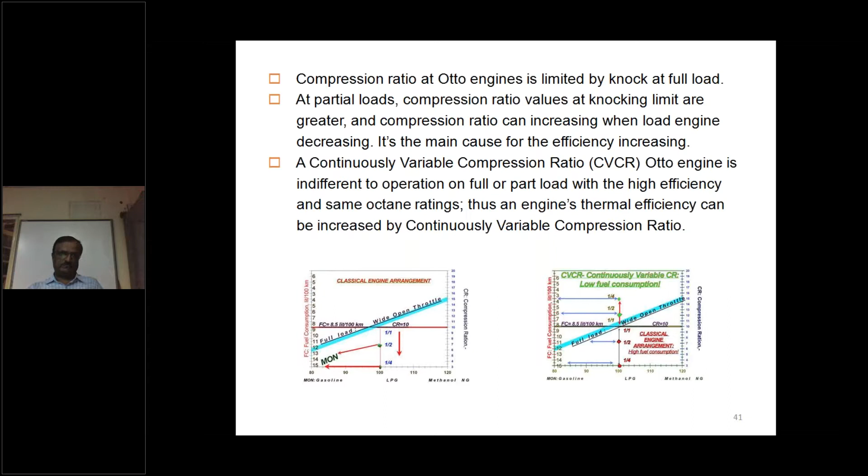Thus an engine's thermal efficiency can be increased by continuously varying the compression ratios. Due to the higher compression ratio, it is possible to achieve good fuel economy. That is always there. So these are the things we just got.

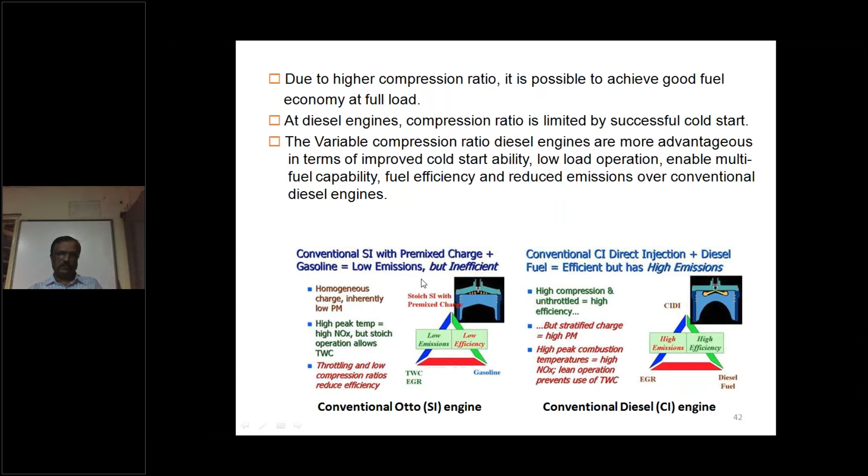With this, we can think that combining all these advantages, we can have future engines which will have the smooth running, low emissions advantage of the SI engines, then the higher load-taking capacity and higher power at part loads characteristic of the CI engines. So combining this, if we develop it, that will be an ideal engine for us, and we can have a future engine.

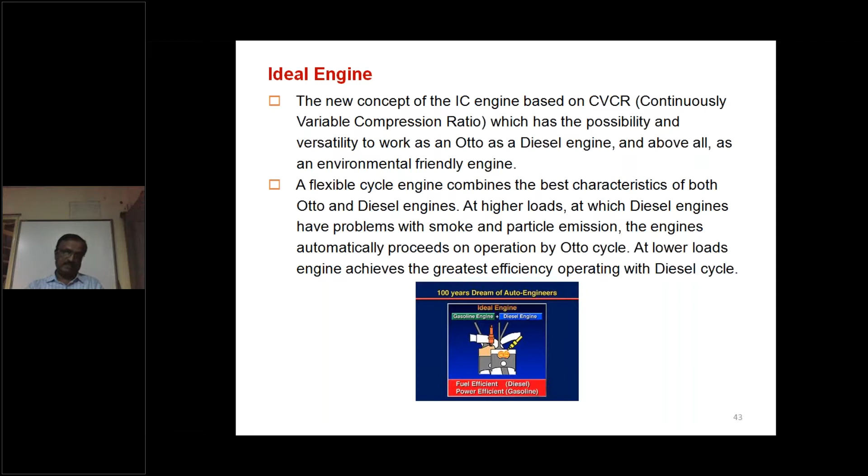So we, as engineers, require such types of engines. It's a dream of automobile engineers. So these are regarding the performance parameters that we have discussed.

By small changes, or completely modifying the engines, we can get higher efficiencies and lower emissions - changing the hardware of the engines. The other side is the fuel. As petroleum products are depleting day by day, we have to search for alternative sources of fuels.

Nowadays biofuels are being used as an alternative source of energy. Biofuels are derived from vegetable oils, as you know. It is renewable in nature, and we can extract abundant quantities of vegetable oils. So this can be used for vehicles in future whenever we lack petroleum products.

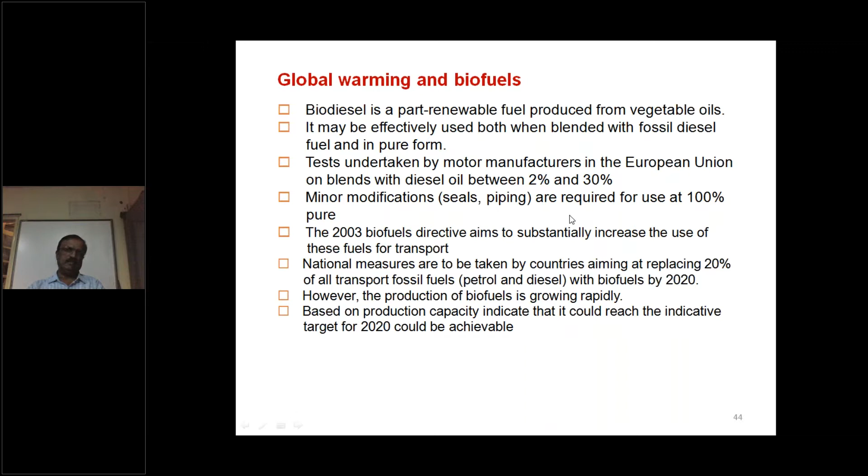Maybe day after tomorrow he will be dealing with that session. So here he will be dealing with biodiesels in detail - what are the advantages of this, how it gives performance similar to that of diesel, and what modifications are needed for this.

This is a session in which I just try to give an announcement of the recent trends that are being taken place or considered by researchers in order to improve performance. These are the advances in engines. Thank you friends, this is the end of my session.